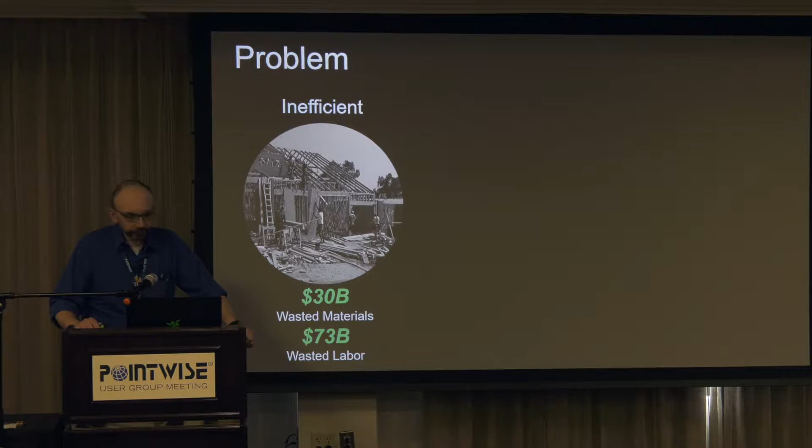We have a problem in one of our largest American industries, the building industry. It is extremely inefficient. According to an NSF study a couple of years ago, you get $30 billion in wasted material, $73 billion in wasted labor. Customization—if you want anything but a box, your cost goes up by an order of magnitude. Even though we have all these wonderful digital tools to design things, if you've designed anything but a box, you're kind of out of luck. And there's no way to transfer that digital information to the construction site.

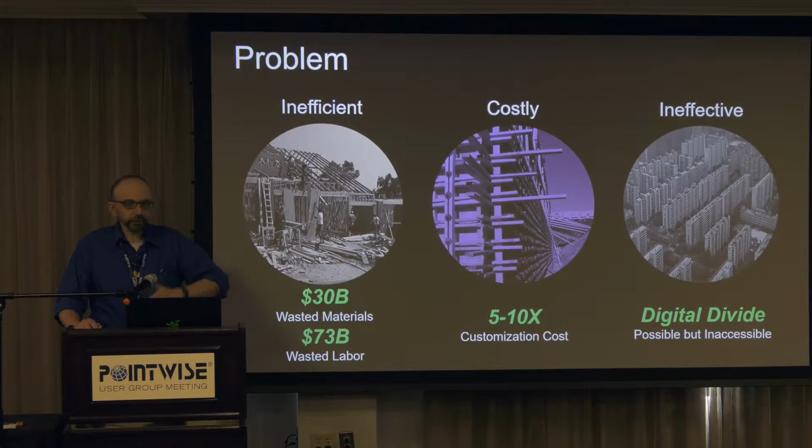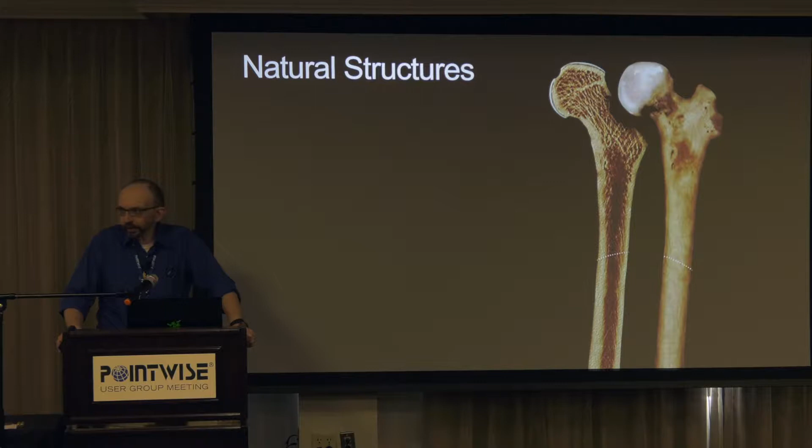My boss is an architect, and he is very inspired by natural structures. If you think about the way things work in nature, there are no boxes in nature. Nobody builds a box. Material is at a premium, so things are built for strength, resilience, and efficiency, and there's lots of variety.

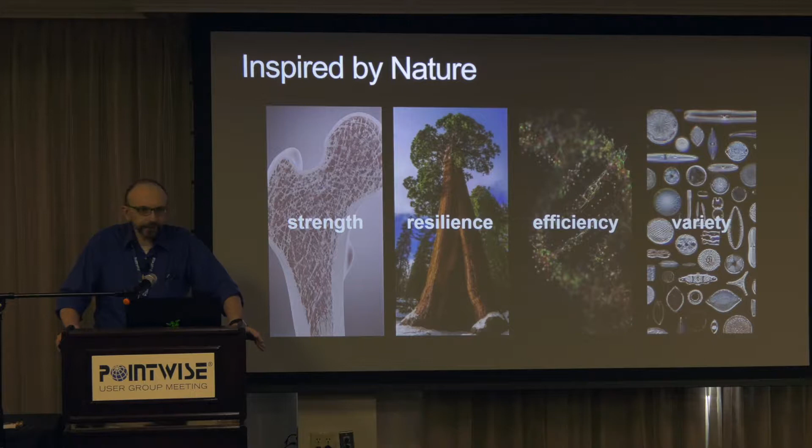What does that have to do with us? Well, that's a mesh. So my boss had the idea: if I could construct a mesh, maybe I can make a building out of it.

And so we figured out how to do that. We can print that—we can print a mesh. There's an example of that out on the table outside. You're welcome to pick it up and play with it. Don't run off with it, though—John will shoot you.

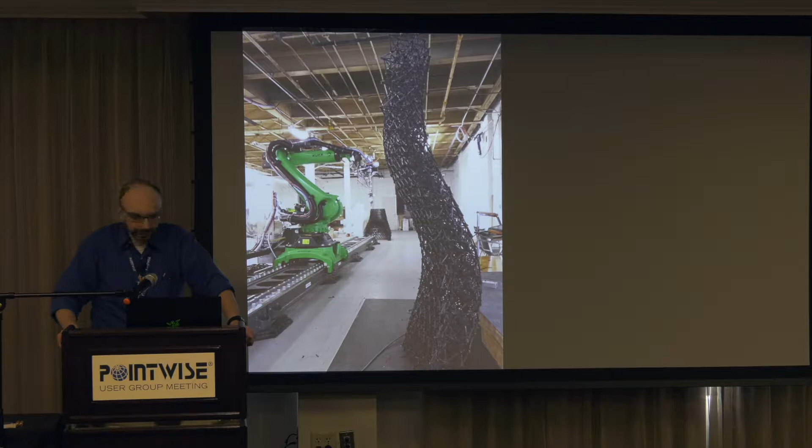This is how we do it. We have a large industrial scale robot that is an off-the-shelf robot, but the mechanism on the end is our proprietary technology, and it can print structures like that. We now have 4 robots at one facility and 4 at another, and we just ordered 5 more. So we have the capacity to make a lot of very large things now.

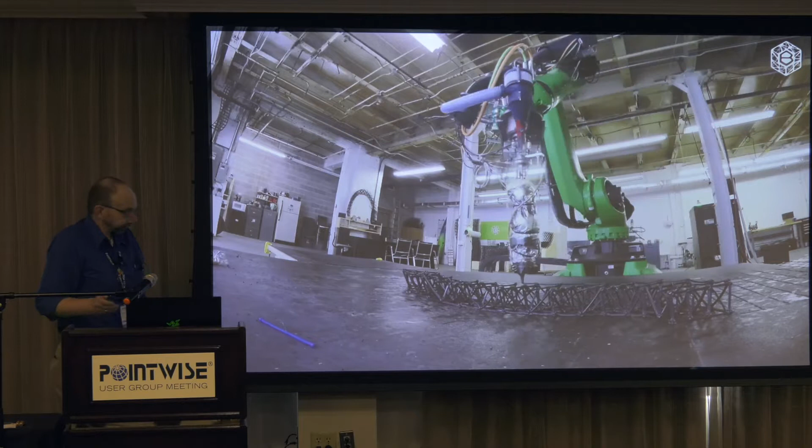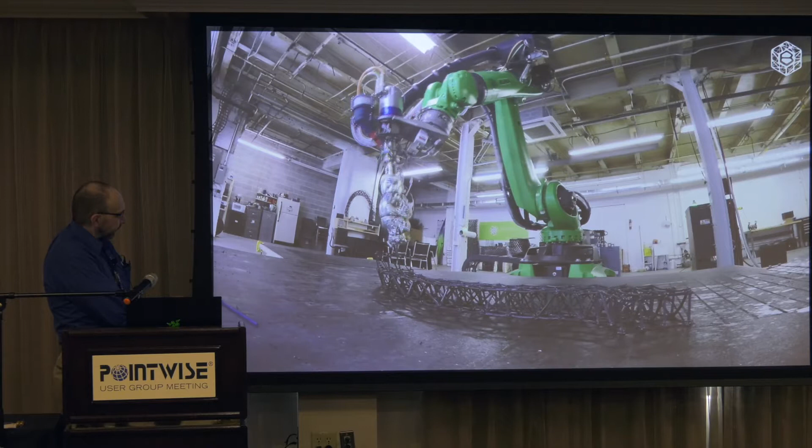This is what it looks like—this is sped up, we wish it went this fast. The important part is, you'll see right there, it is printing the plastic literally into the middle of the air. The plastic solidifies as it comes out of the end of the nozzle, and we are able to create our mesh-like structures. You can see me running around in there somewhere.

Well, how am I going to make a wall out of that? The idea is you make the prefabricated frame, you fill it up with familiar materials—spray foam, concrete, whatever—and so you create this custom composite.

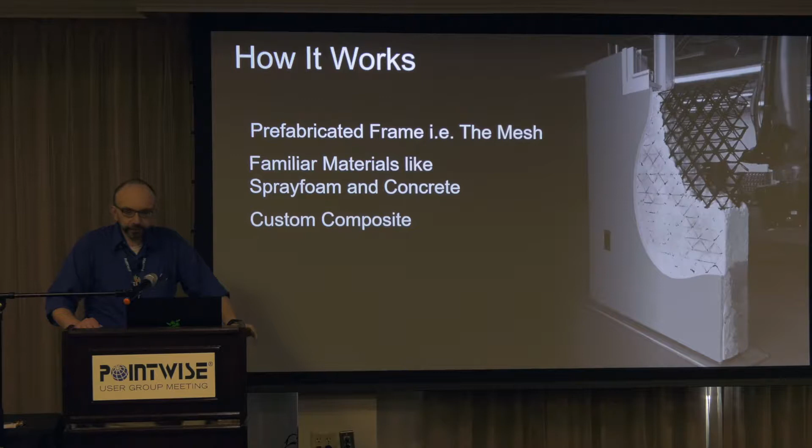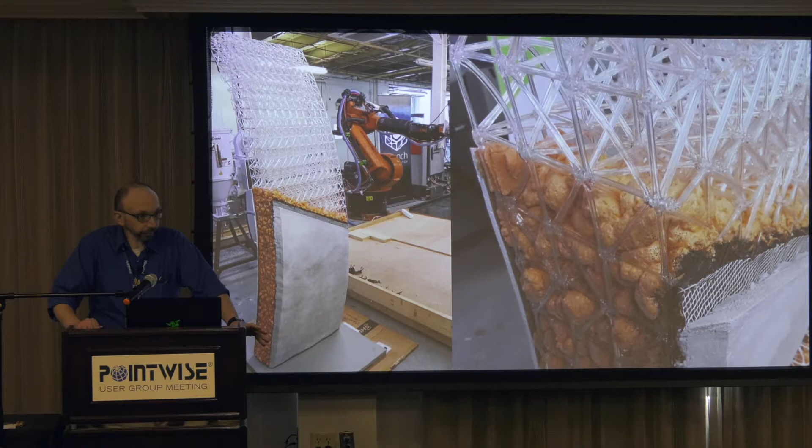It looks like this. That orange stuff, I'm pretty sure, is Great Stuff from Home Depot. If you've had your house insulated, or seen a building insulated with spray foam, that is essentially what it is—the same sort of formulation. It's a closed cell expanding foam. Has a tremendous R value, a tremendous insulation value.

Our stuff is pretty strong. It is not brittle—it is a large truss structure, so it hangs together pretty well.

But to accomplish this, you require an enormous amount of interacting technology—robotics, material science, building science, hardware. But none of that is my job. My job is the software.

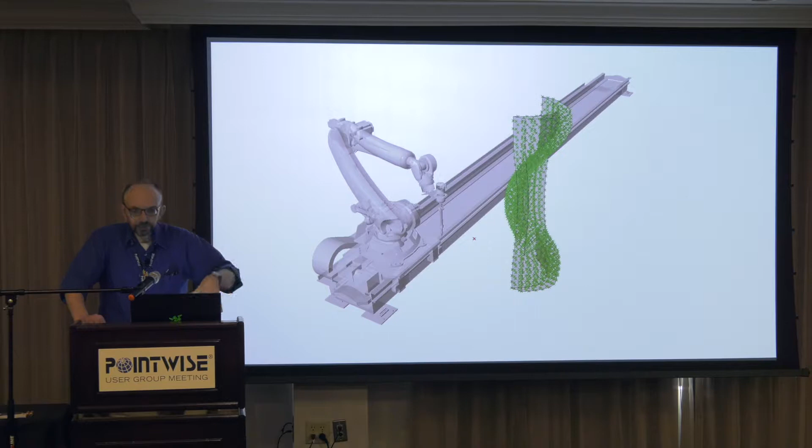How did I come to that? Well, just a brief story. The young man you saw standing on the beam is the co-founder of the company, and he had developed a way to get the robot to follow this pattern and print the plastic.

I remember sitting down with him when I was a consultant there, and he said, well, I take and make sure I have some number of points this way, and then some number of points that way, so that makes a little kind of crosshatch grid, and then I just carry that up through the part, so I always know where I am in space.

And I said, you are creating a structured grid—that problem has been solved for 30 years. Let me show you. I opened up Pointwise, and with 5 clicks made a structured grid for him. And they just went, oh, you can do that. Yeah, I can do that.

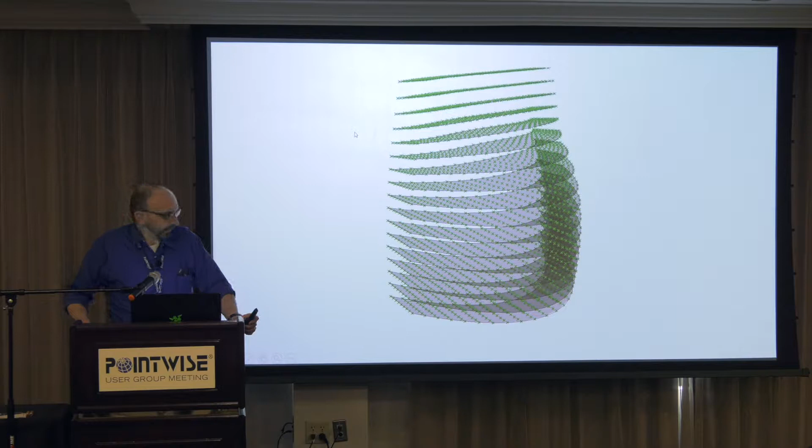So we went on, and I have done many, many projects, and I have made them all in Pointwise. So that's what I'm going to show you today, all these things that have been made with Pointwise.

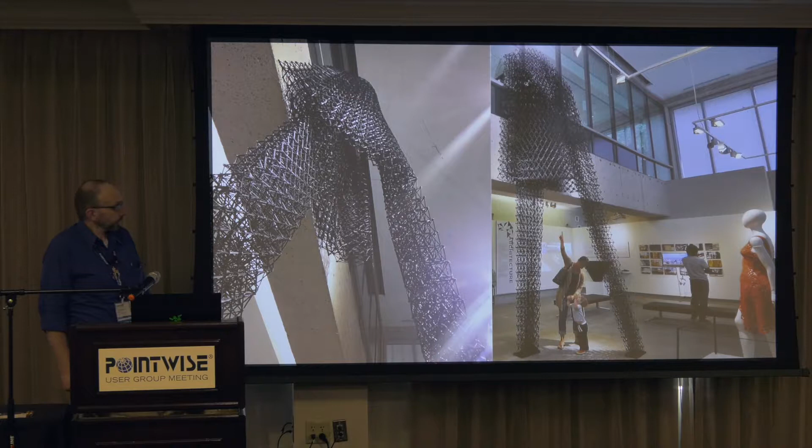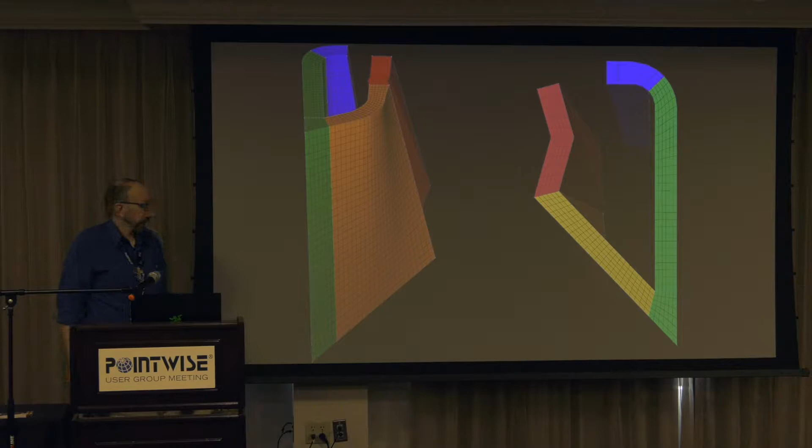Quickly, this is a project that went into the Museum of Art and the Museum of Design in Atlanta. It was designed by the same gentleman who designed, along with his wife, the 9/11 memorial at the Pentagon. And that is the blocking structure for the top. I don't think they would have been able to figure it out unless I had blocked it for them in Pointwise, because he had got up through the legs with his ad hoc technique and then had no idea what to do. And I said, well, I can just make you different blocks.

You can split it up? Yeah, I can split it up. So as far as I know, that was the very first thing ever made, physically made, with Pointwise. This was our second project. It's a map of the Tennessee River Gorge.

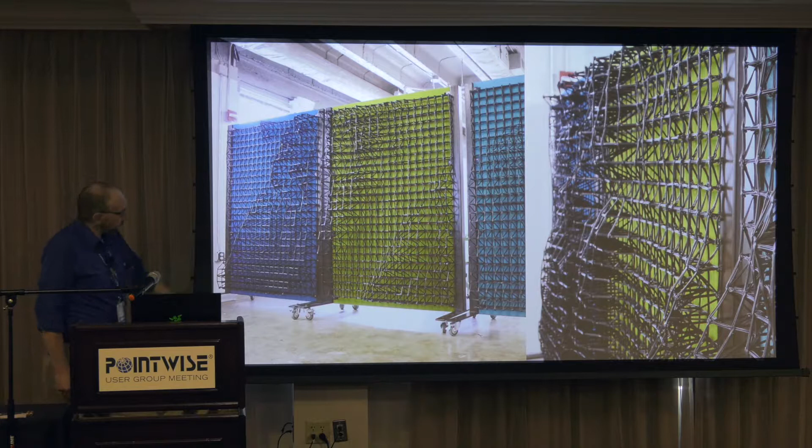This is a project that went into Cheekwood Gardens in Nashville that, 2 years ago, we won the Meshy Award with this. I really do like this representation because it shows you what is happening. You have a geometry, not CAD. You make a grid, and then you make the thing. And that is the way the process works.

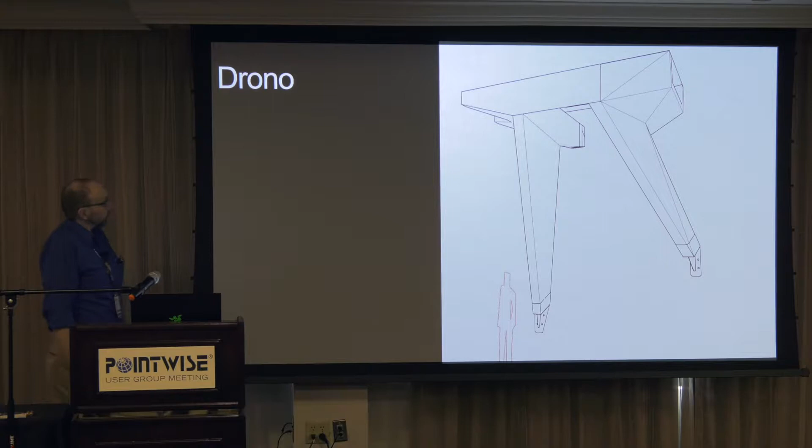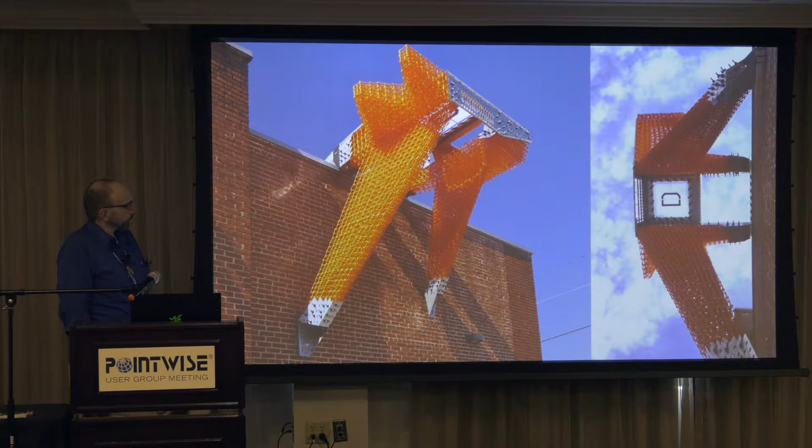Keith Caseman also said, hey, can I make this weird shape? And I said, I don't know how to do that, I'm going to have to figure this out. But obviously we did. That is University of Tennessee orange, not University of Texas orange. So it still sits in Knoxville. You can see it if you're driving up 75, I think. But the important thing is, and what we care about here, is this is how it got made in Pointwise, just like you would make anything else.

I had a geometry. I put a multi-block grid in it. But I had to figure out how to deal with the fact that the legs were one width at the top and a shorter width at the bottom. And we have a printing limit of between about 40 and 80 millimeters on our segment lengths. So if I chose one length at the top, it was the wrong one at the bottom, and vice versa. Like, how am I going to do this?

So I said, well, what if I don't have to make the points match up? What if I can get rid of points as I go along the volume? Because this would actually be printed upside down from the way you're viewing it, so it doesn't matter. As long as the robot has a place to land, it doesn't matter if it doesn't land at every point that was below it. That's fine.

And this was the first time we did something called transition blocking, and it turned out to be vital. Like most of the rest of the projects we have ever done, we could not have gotten done unless I just ad hoc came up with this. Which is, by the way, nothing you would ever do in a CFD solver. I mean, you might do this iblanking kind of stuff, but you would not, unless you had a very specific application, throw away points for no reason, because you don't have the same kind of spacing requirements that we do.

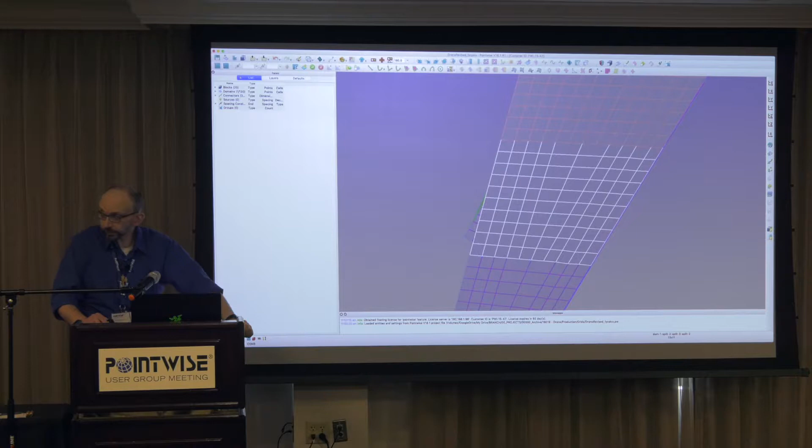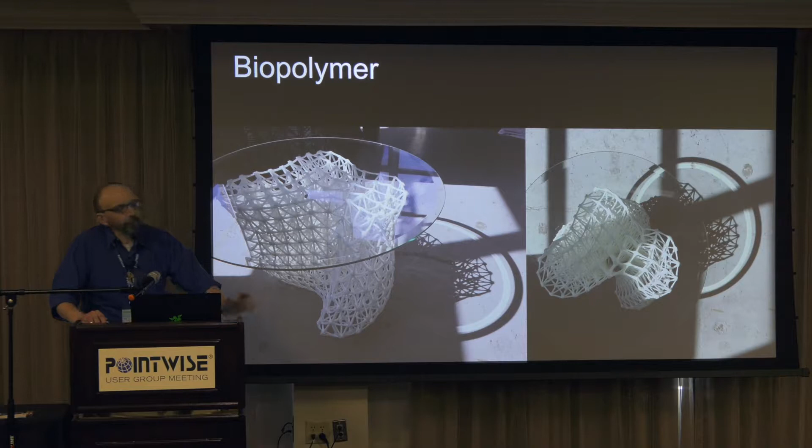We also once tried to print something made from swamp algae. It smelled pretty bad when we printed it. I think somebody described it as like a flaming diaper. So we didn't go down that road. We decided there were other things.

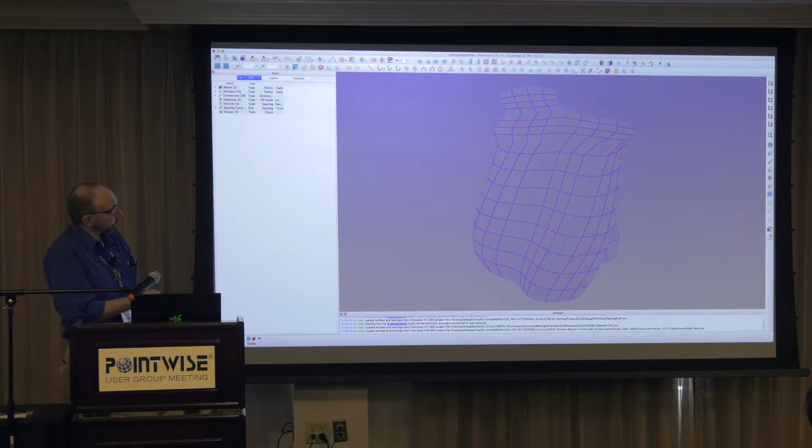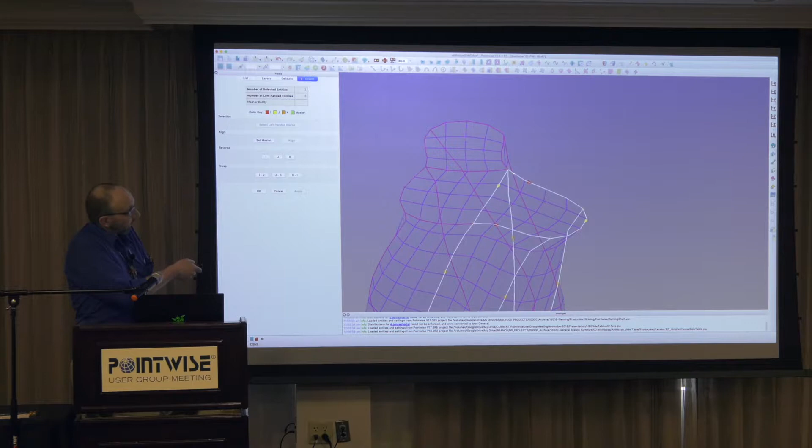But one of the things that I really learned from the furniture was to do a multi-block setup. If I'm on an industrial scale where we don't have to make the individual blocks and stick them together afterwards, it's really important to get the orientations of the block correct so that I can print this block, which gives me that edge, and then as I print this block, that edge is there and I just have to omit it from the program. So that sequencing also became something very important later.

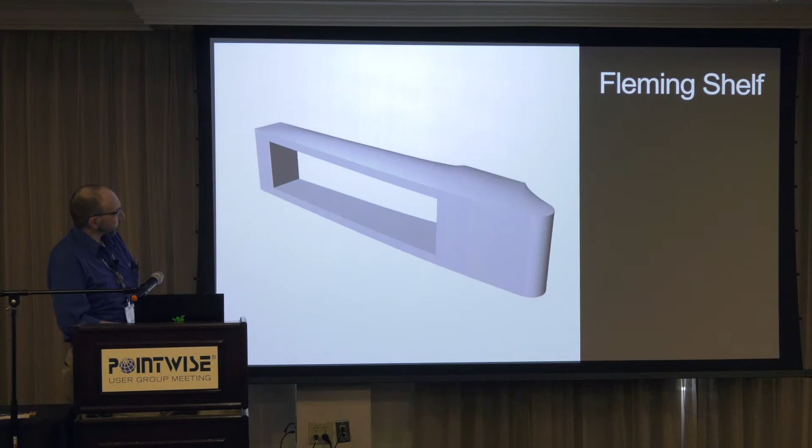We did a little shelf. It's honestly not very interesting.

We had an Air Force general coming through, and I said he'll know what this is. So I made a mesh of an Onera M6 that I had lying around, and he did know what it was. So that was nice.

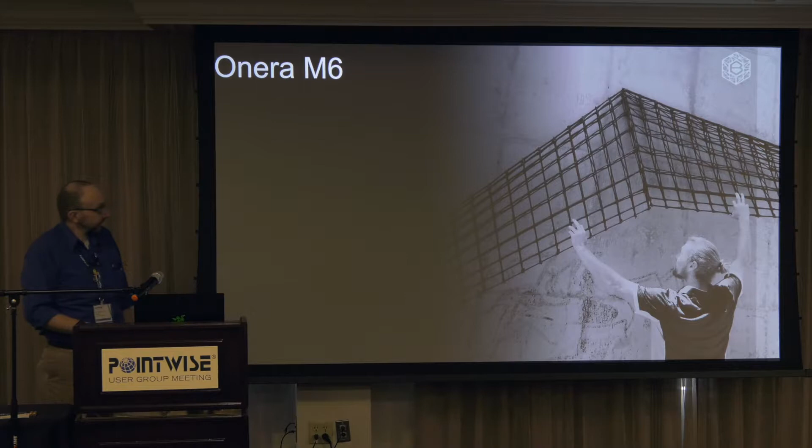I talked about most of that the last time I was here, but this I could not talk about. In fact, we were working on it 2 years ago when I was giving a presentation here, and my boss was yelling at me for going out of town, calling me saying I need this, I need that. But this is the project that really launched the company, to be honest with you. This is what has generated all of our buzz.

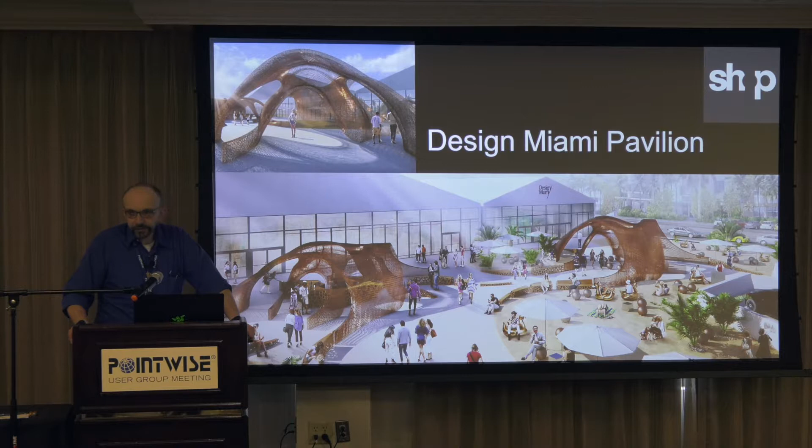A design firm called Shop, out of New York, said, hey, we're going to make this pavilion thing for a design exposition in Miami. Can you do it? And we said, well, we don't have the capacity, but we'll gear up. And we did manage.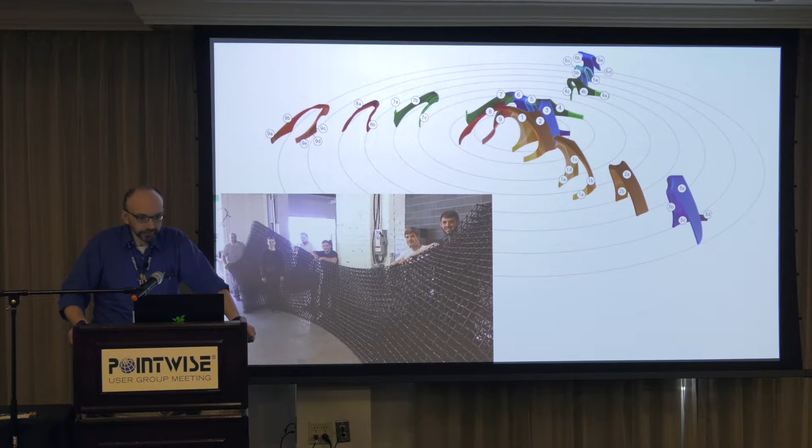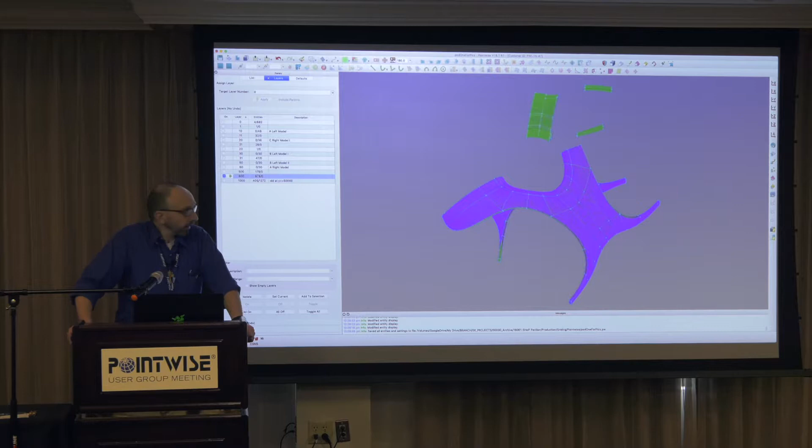So we got this design. One of the pavilions has something on the order of 20 parts. We had to part it up. You can see they get really big. That's what it looks like. That's what the geometry looked like in Pointwise. Fortunately, it had a lot of both mirror and rotational symmetry, so I didn't have to grid the whole thing. But this is huge in terms of what we normally do.

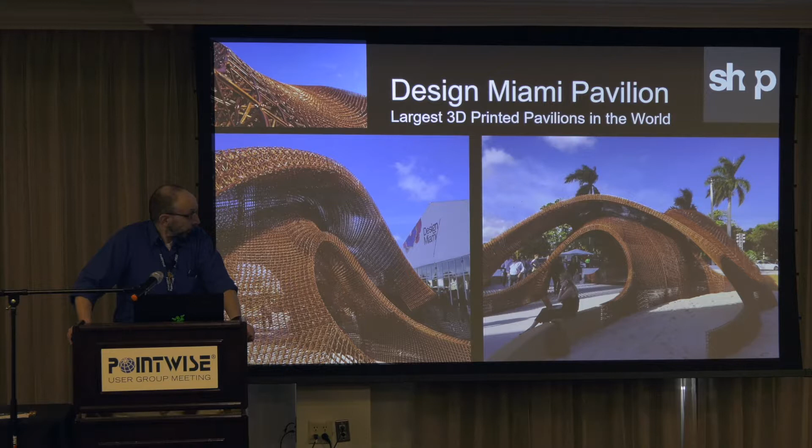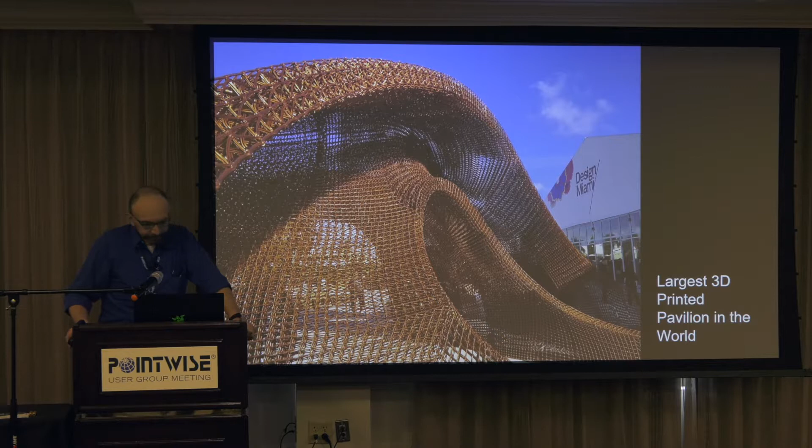But it turned out pretty well. It worked. And if you look carefully, you can see where a connector was. I can look at our stuff and pick out, I put a connector there, I put a connector there. The other parts, the lighter brown parts, were actually printed by Oak Ridge National Lab as part of the project.

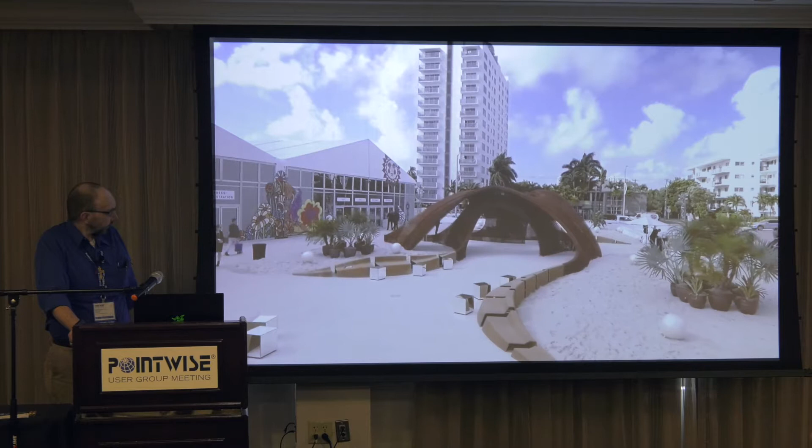But this is a very nice shot of the whole thing. It seems to be jumpy. One of the SHoP guys took a drone down to the install and flew it around, and we just thought, well, this is great.

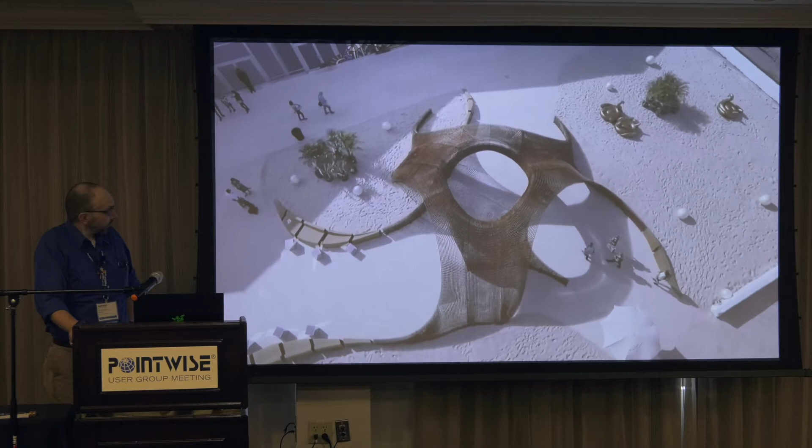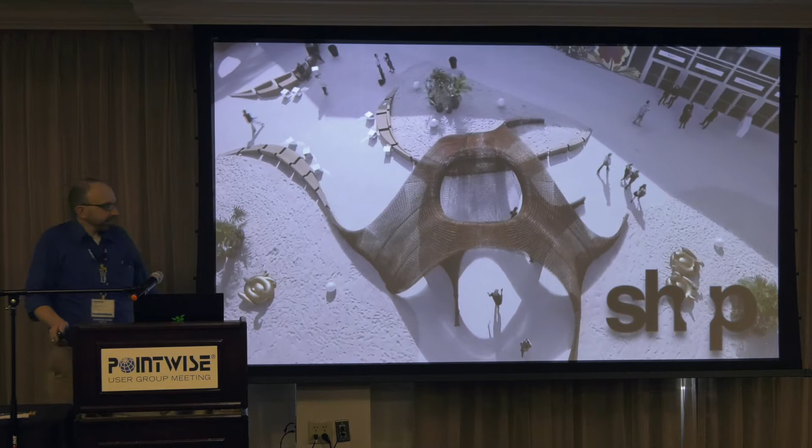Well, no, let me. You all right? Well, this was a conference of designers, so you had all adults around it. And I'm sorry it's a little jumpy, I think it's the computer.

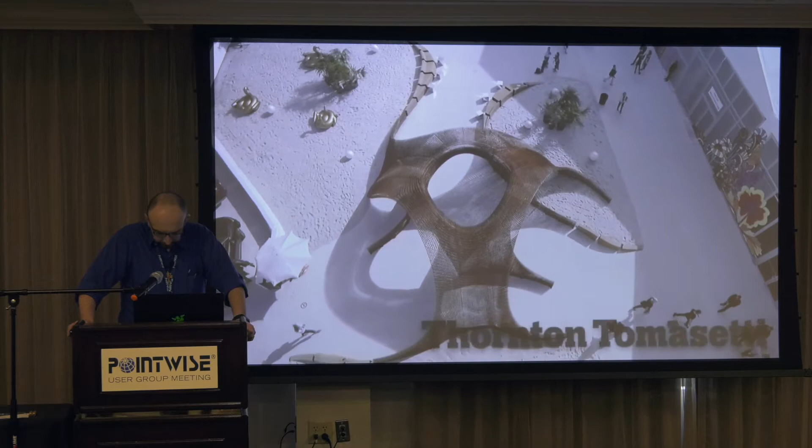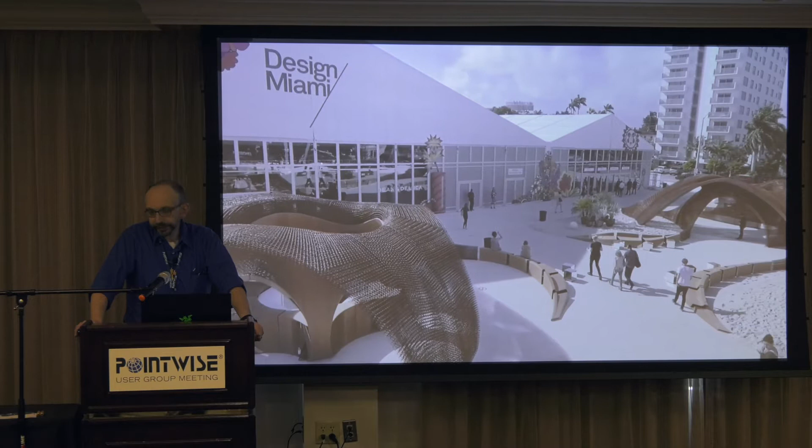What I will tell you is that part of the contract was this was here, and then it was at this design exposition, and then it was moved to an upscale kind of mall area. And the contract said it had to be taken down if the winds were predicted to be higher than 60 miles an hour. They didn't, and it has been through 2 hurricanes, and it is just fine. So I'm kind of proud of that. I'm like, hey, it didn't fall down.

But is it kid-proof? No, it is not kid-proof.

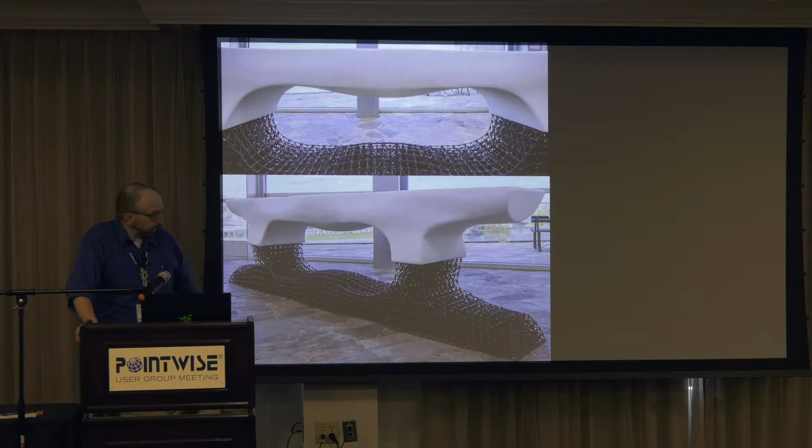This is a bench we made in collaboration with MIT. And the important part here is that they took our grid structure from a basic form and they did some fancy FEM and modified it to improve the stiffness. So they gave us back our grid, which was great.

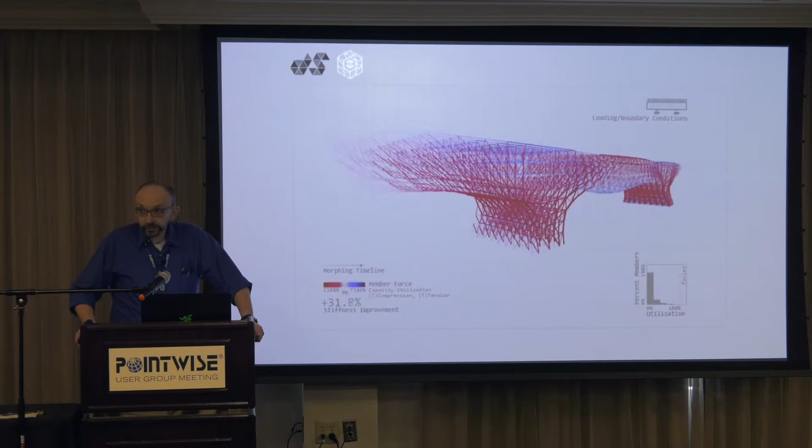Except they really didn't. They just gave me back a whole bunch of points and edges. I'm like, this is not a grid. There's no connectivity here. What am I going to do? Well, I'm going to make it by hand and make sure it lines up with everything they told me, which I was able to do in Pointwise. And I did pretty good.

Wait a minute, I went too fast. So it worked out quite well. We actually had a surfboard guy who works for us now give it that white finish.

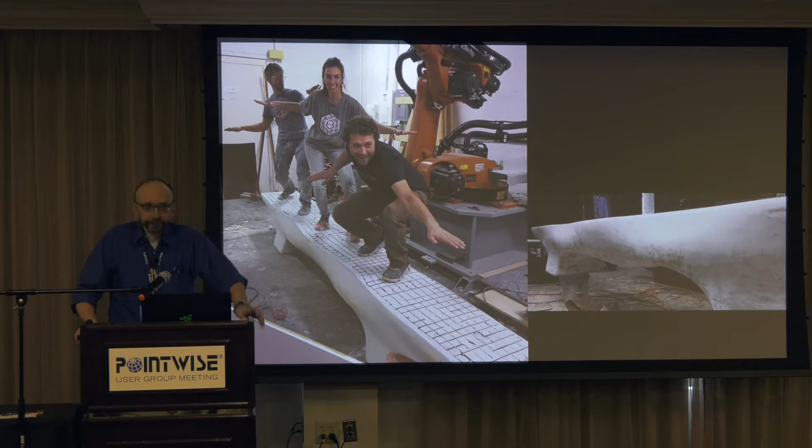Okay, next big project, something called Nature Cloud. This was a project we were approached about to put in the Natural Museum of History in Chicago. They said they wanted to have these hanging plants. They had a French designer who said, can you print something like this? Yeah, we can do this. Do you have a design? Yes, we have a design.

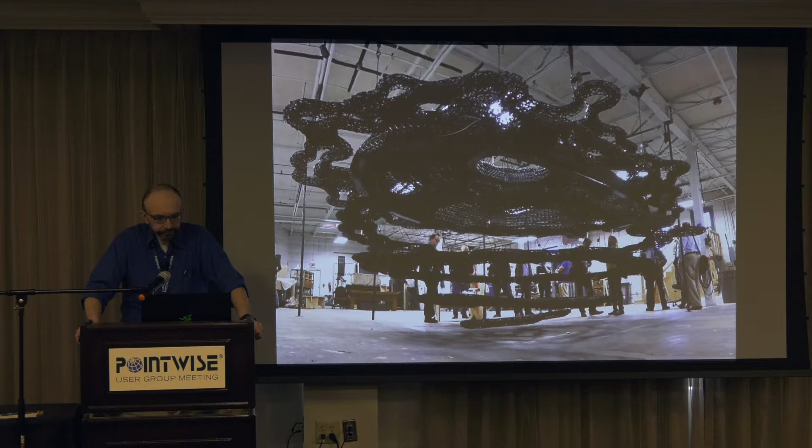So this is the prototype. It's a lot of hanging grid. It winds up looking like this, what you put the plants and the cute purple lights in it.

They were happy with the prototypes, and they said, here, make 4 of them and make one of them really big. Okay, we can do that.

That is the geometry for the cloud we called stratus. This one is the big one, and it is designed to be lowered down, as you saw it there on the ground, so that you could actually have some sort of a reception inside of it. That was the idea, so that when their big donors come, they'll lower it down and they'll have a cocktail party inside this big plant.

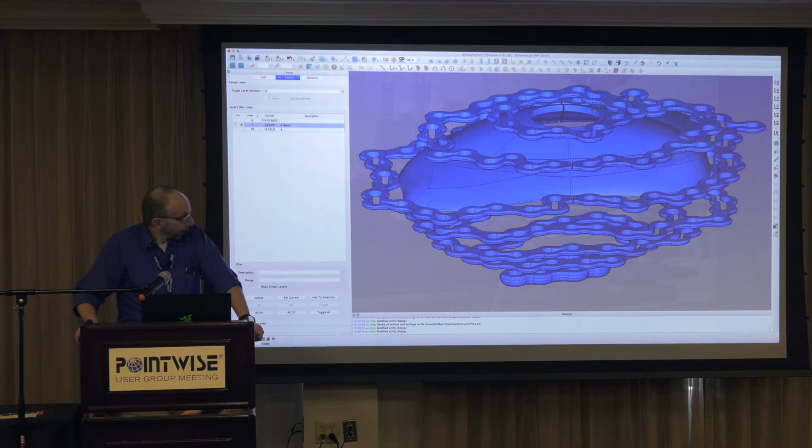That's the grid. And if you think you get bad geometry, the geometry I get is terrible. You can see this is one piece, and it does not in any way connect with the pieces around it. I have geometry inside of geometry.

I can't fix it, so we just grid over it and make it look right. This geometry actually turned out to be not too bad because I could copy and paste a lot.

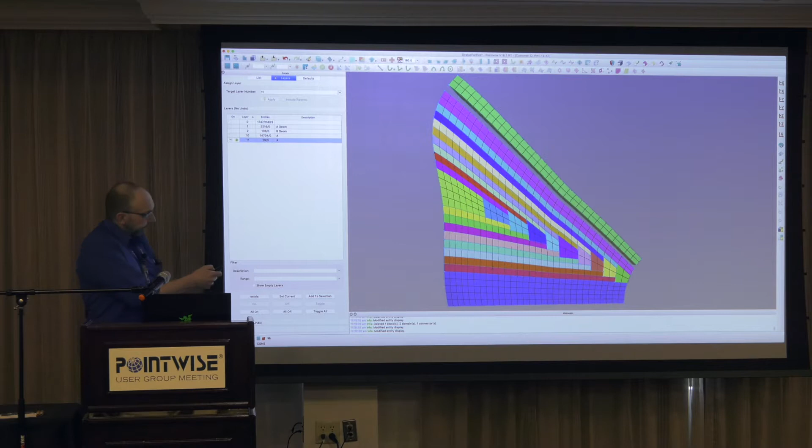But I wound up having to go back to a technique I had developed before in the transition blocking, like I told you about before, where you can see that the points don't match. I've got 2 cells here and 1 cell next to it, because that was the only way to grid that distance and that distance. You can't do it any other way.

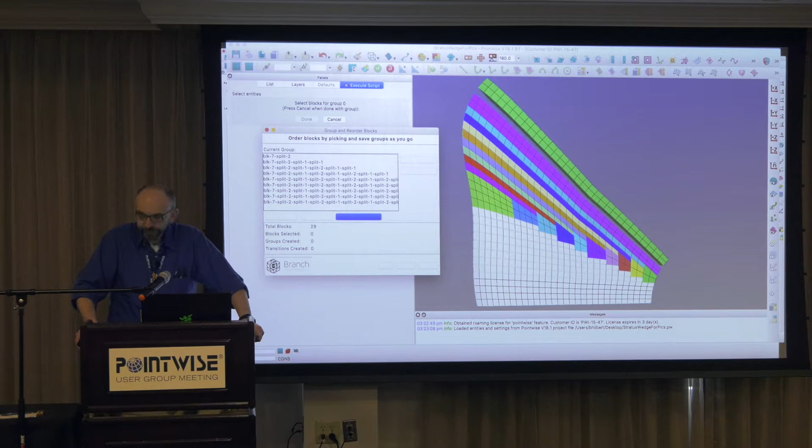And it became really difficult to find the blocking structure to say, all right, I got to print this one, this one, this one, this one. So we wrote a script so that I could pick them in order and know what I had picked, and then write them out appropriately so that we could send it on to our path planning software and then to the robot.

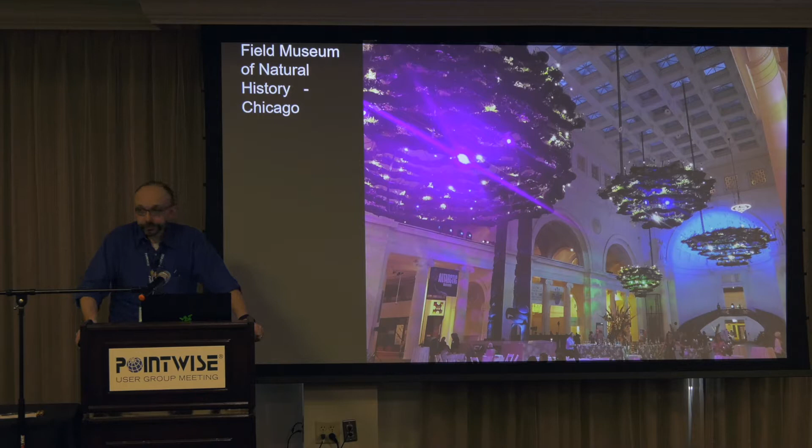It worked. We made 4 large clouds, and they were very happy with them. We recently had a friend of ours go through the museum and say they look great.

And they had a quadrangle where they wanted a band shell. So they came to us because they had seen the Miami Pavilion and said, can you build us something like this? I said, sure. So we sent it to the engineer.

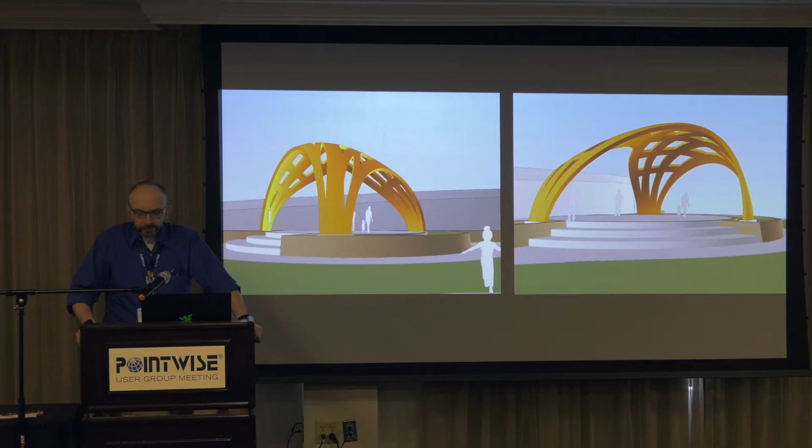And decided to do a form study. So they took the form and we optimized and we optimized and we optimized a lot. We went back and forth forever. And finally came up with this shape.

So it doesn't have to be a dome. You can take out all that material and everything is just fine.

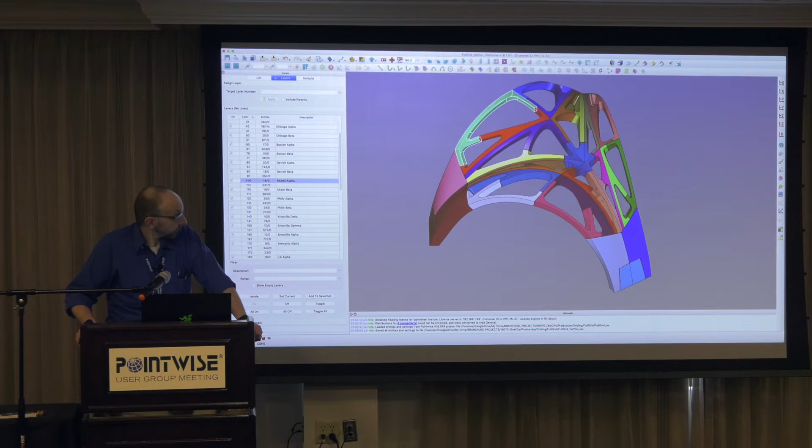And I'm going to run out of... So there is the geometry in Pointwise. And that is the grid. This is almost 1,000 cubic feet of printing. It's huge.

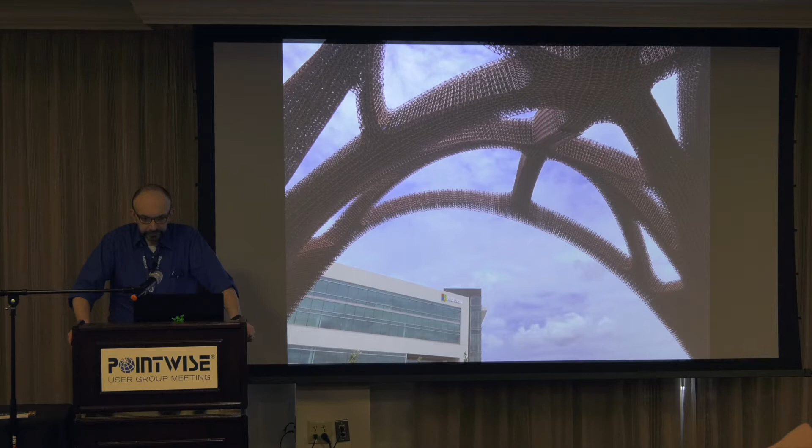And there it is in Nashville. You can see the Microsoft building if you stand under it. And that's just to give you a sense of scale because, well, there's a man standing up. So it's huge. It's overwhelming to stand under.

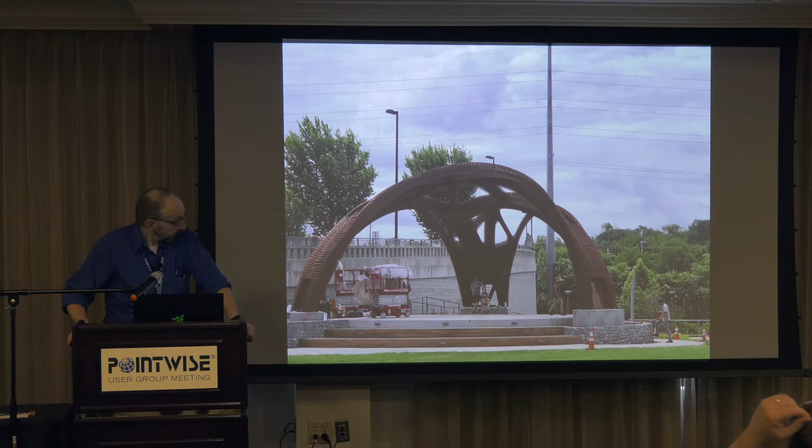And we made a nice video. This was for, and you'll have to forgive the hyperbole, but an architect made this. This was made for a conference called IASS, I think it's International Association for Shell and Spatial Structures. And they had a contest about the best shell structure, and this was analyzed as a shell structure, so they wanted us to enter.

That's the fun part. Yes, we had to print things sideways.

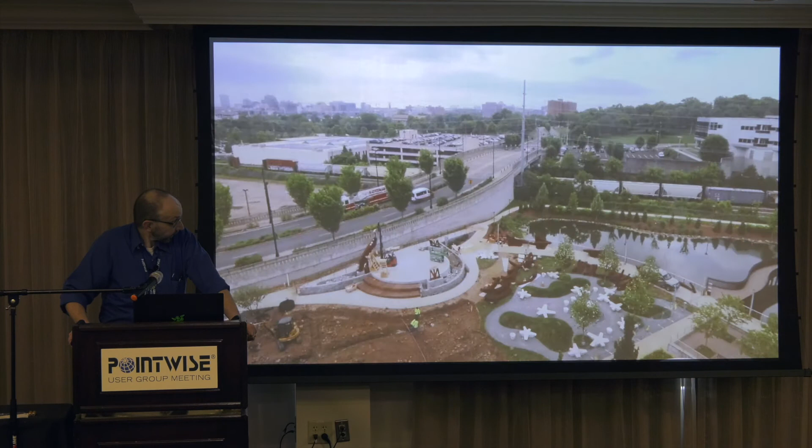Like I said, hyperbole. I'm in there somewhere.

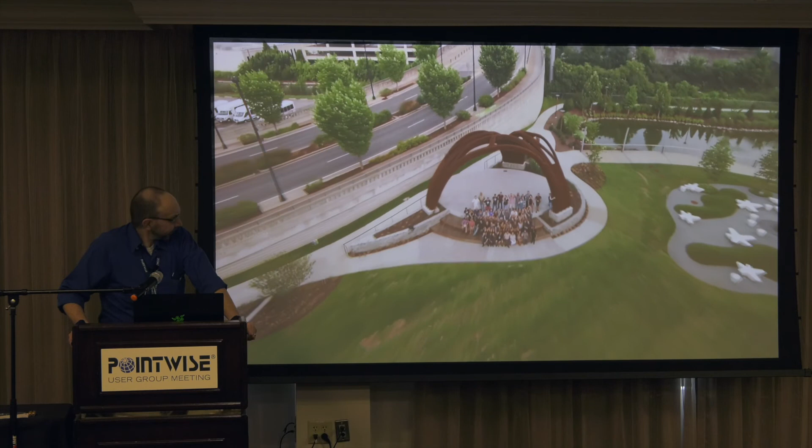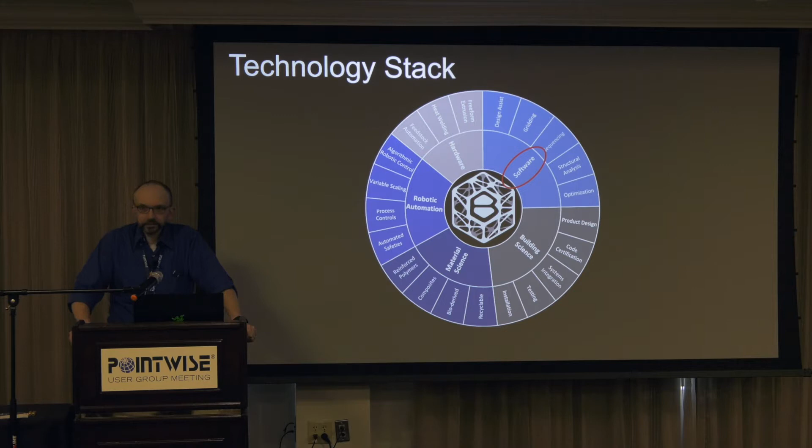I'm going to run out of time, but I do want to talk about software. I realized when I did this project that our process of doing a structured grid is way too prone to human error, because I have to create transition blocks all over the place. Once I've picked where one is, I'm stuck, I can't move it around without tearing the whole grid apart. So if I choose poorly, I'm in trouble, and time is often of the essence because we're trying to keep up with the robots.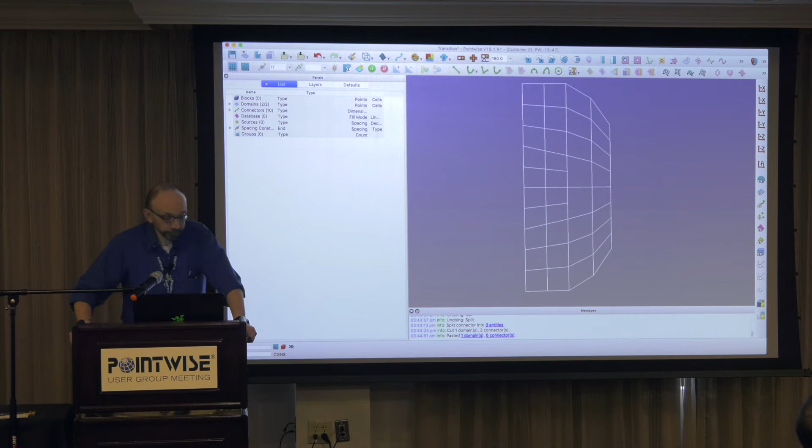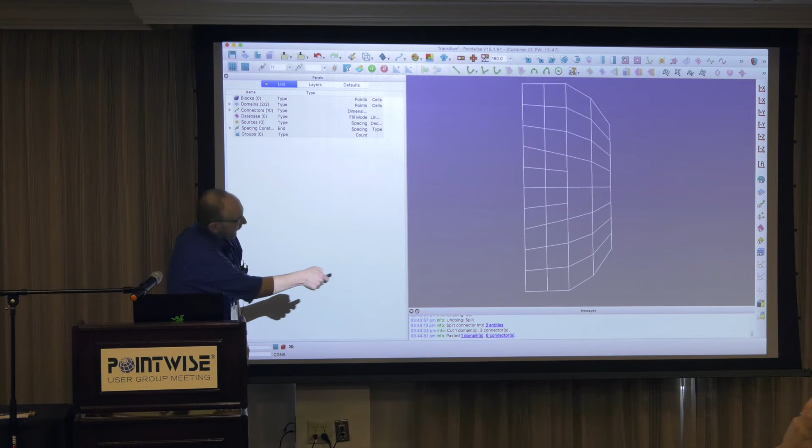So I had my colleague Philip write a few scripts that allowed us to move the points, distribute them appropriately in the middle, and then I could split blocks, and I would have two nice segments, this 40 millimeters and this 40 millimeters, so the whole thing winds up being 80 and we can print that way. That was the point.

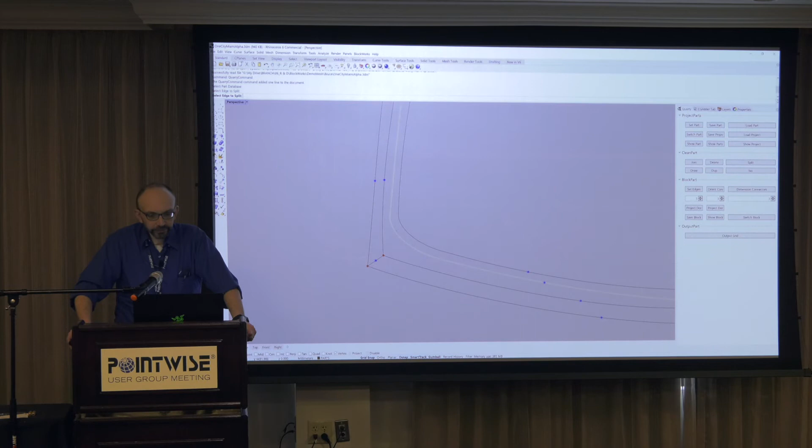I'm going to skip through this, but we did wind up writing our own tool in Rhino. It's a mesh generator, but really more of a mesh helper, because one of our guys wrote a way to block things, but I wind up blocking things in Pointwise in the beginning, and then bringing it into here to do smoothing.

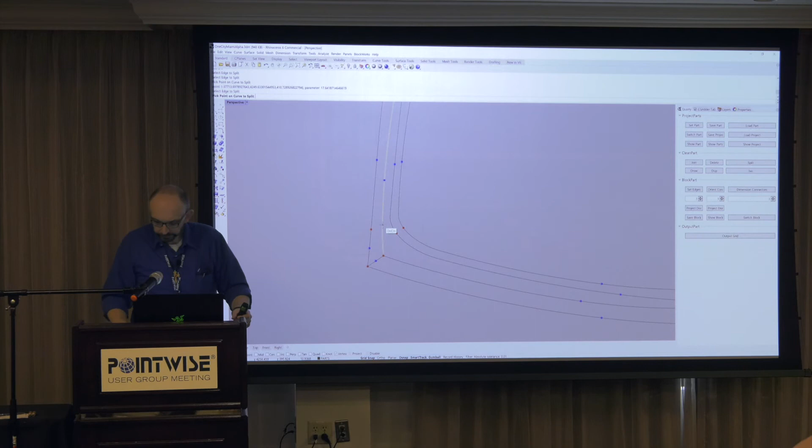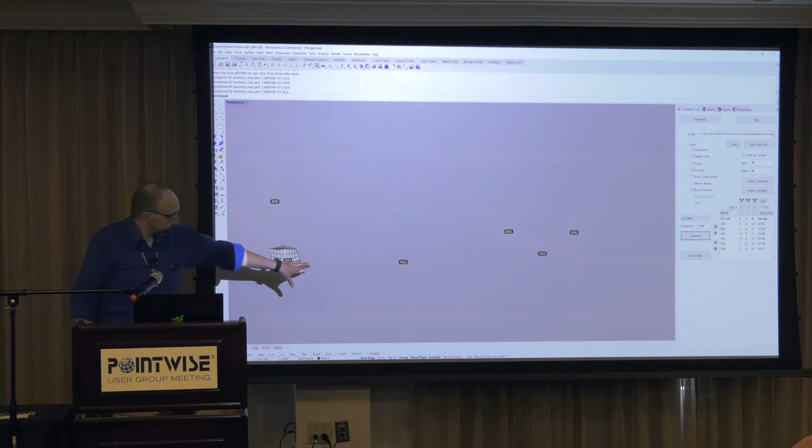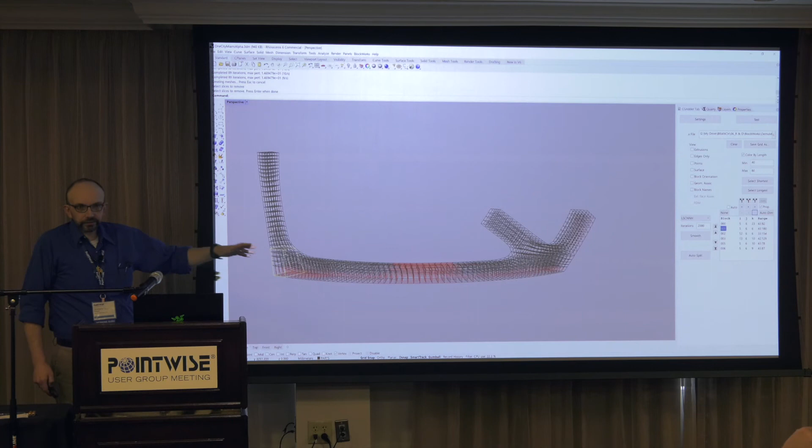Let me see if I can skip ahead. There we go. So you'll see the red segments mean they're too long, and so we add a slice, or do a whole bunch of stuff. Watch the points move, you can see how it's smoothing the grid. We are smoothing this grid with basically the same technology that Steve is using to smooth things in Pointwise to create the higher order meshes.

Guess who my advisor was?

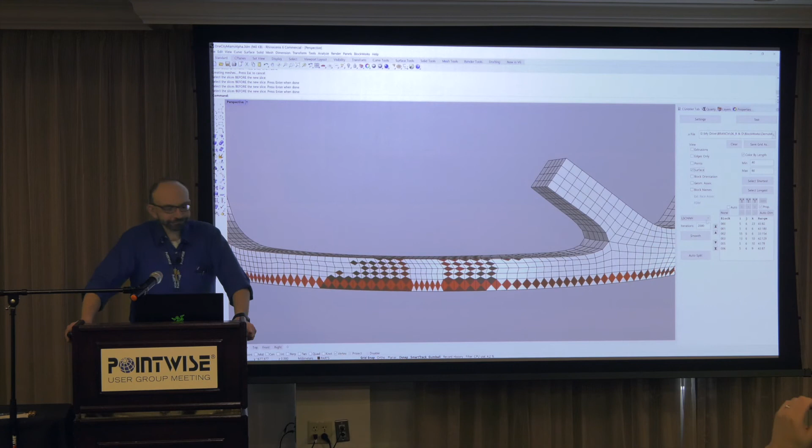So it doesn't matter, and this is the brilliant part, the part we absolutely had to have. It doesn't matter where you add the points, once you hit the smoother, everything can move around and we can be fine. That works across blocks, and it's a very specialized tool so we can make sure everything's greater than 40, everything's less than 80, and we can print this.

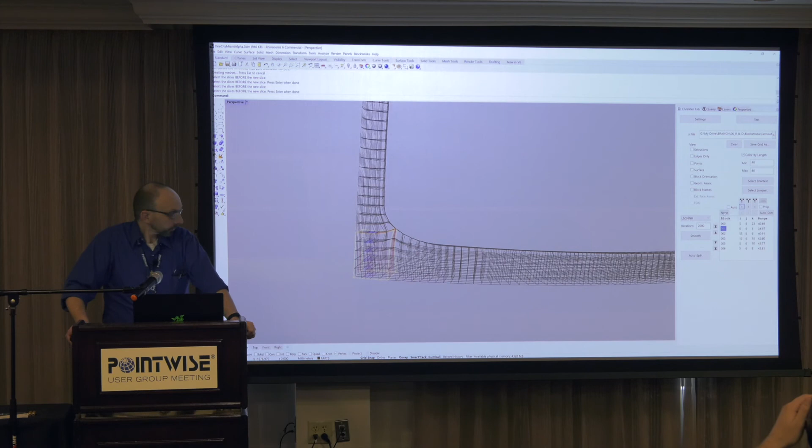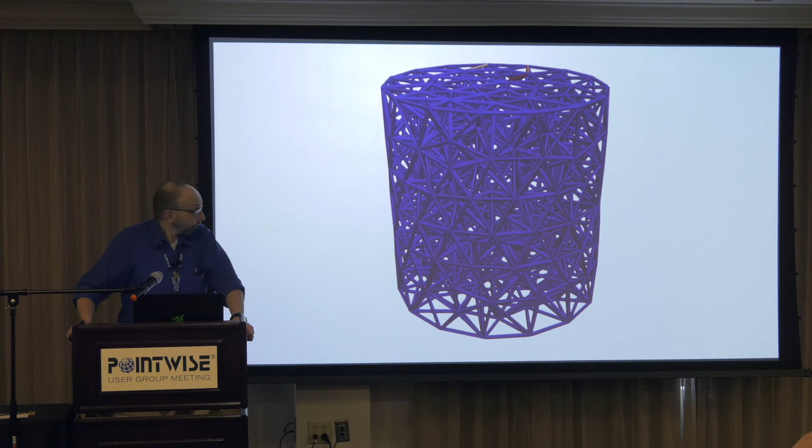I want to go real quick because in the future, I don't want to make structured grids anymore. Really and truly, I don't want to make structured grids anymore. So how am I going to do an unstructured grid? Well, I'm going to make one in Pointwise, nothing but a tetrahedral grid. It's very simple, I've just ensured all my segments are greater than 40 millimeters and less than 80 on the correct scale, and we're fine.

Well, now what do I do, how do I tell the robot to print this? Because the reason we use structured grids is that we exploit the pattern, we always know which way to walk. I'm here, I'm going to go to here, here, here, I'm going to come back, I'm going to hit these points. I'm exploiting the pattern. Well, there's no pattern by definition.

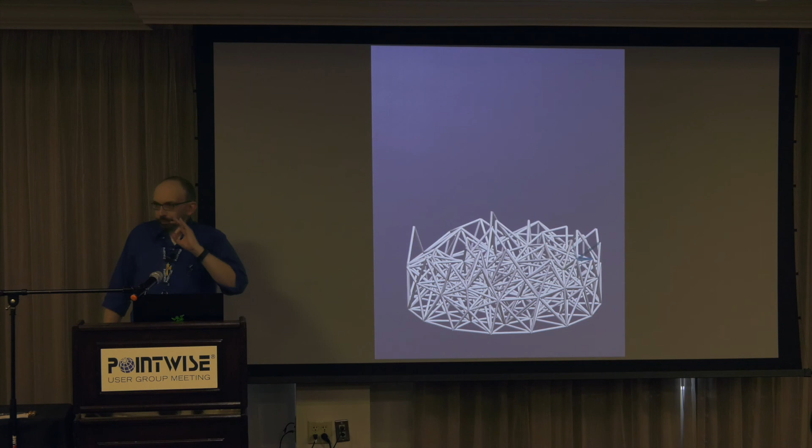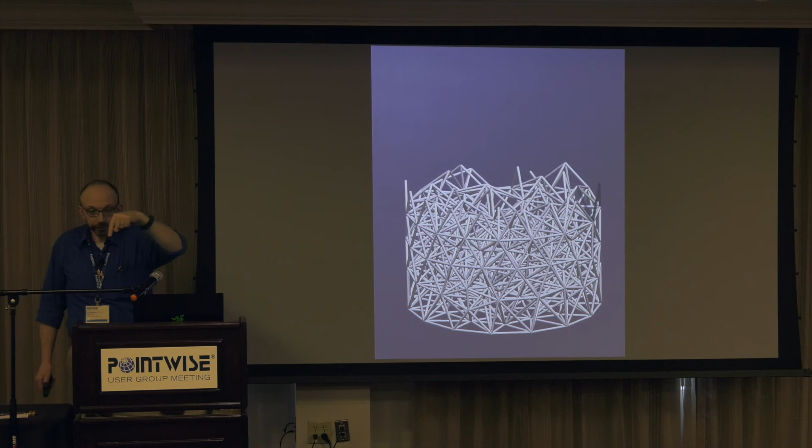Well, got an idea. Come on, play, there we go. So you'll see the blue is the print order. This is a completely reasonable order in which the robot could print this mesh structure, and we have assured that at every point, after every segment is printed, it still stands up and nothing falls over, so you always know if a point was in my mesh and I want to come back to it, it will be there when I want to land on it later.

Believe it or not, we finished this probably a year and 3 months ago, and then we had all these projects, so, all right, well, I can't work on this anymore, we'll go work on making money. But this is our future.

I see that by the time the next user group meeting rolls around, I'll be talking about how I opened Steve Karman's AutoMesh script and clicked, and then I had an unstructured grid, and then I took all those parts and sequenced them with this technology. And that's what you see printed.